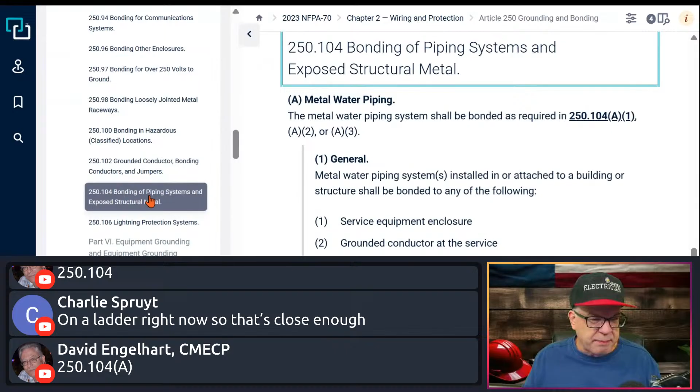So 250, here you see it says bonding of piping systems and exposed structural metal. Let's see it. So metal water piping, the very first one. It says 250.104. The metal water piping system shall be bonded, mandatory language, as required in 250.104 A1, A2, or A3.

A1 is the water piping general. A2 is the bonding when you have multiple occupancies and you have the water piping system in there, how to do that. And then, of course, you have building structures that are supplied by feeders or branch circuits. So we cover it all. You have your main building, a building with multiple occupancies that may have water lines running through all of it, and the one where you have to bond the water lines where a feeder or branch circuit is supplying a separate structure.

In that scenario, if you have the metal water piping, you get all the rules right here, nice and tidy. So if you're on an exam and you get something about the water piping system in a building, you're not thinking about the electrode, because that's different. We're not talking about 250.52 A1, water pipe electrode that is 10 feet in contact with the earth.

This is in the building or on the building, so it can be in it or running along the side of it. You're going to have to bond it. Most of the time we don't think about that today because most of what we use is PVC or PEX. But if you have copper, a metal water piping system running through or on the building, then you've got these rules.

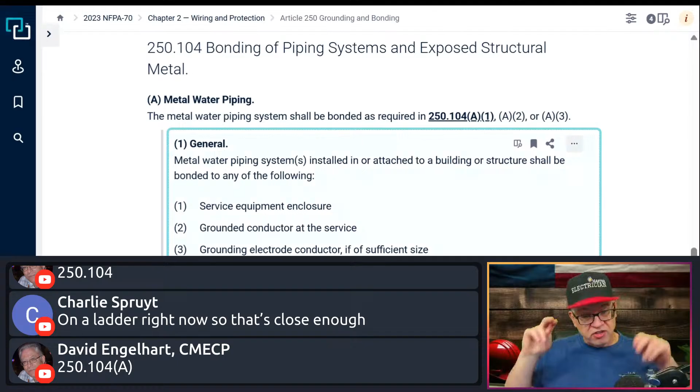If that separates the system, then you're going to have a jumper over it, because then you have part of the system that wouldn't be bonded. You have to bond the system, so it may require bonding jumpers to maintain the integrity of this bond. So where can I make this connection to? Well, I can go from the metal water piping system to the service equipment enclosure, wherever the service is, run it over to the enclosure.

You see here, it says it can go to the enclosure of the service because the service has got the grounded conductor with a main bonding jumper connected to the enclosure, so I'm getting that allowance here. Again, do not confuse applications like this with grounding electrode conductors and things like that. This is different. This is a bonding element.

I can also connect the metal water piping system to the grounded conductor at the service, so I could take it straight to the grounded neutral terminal bus, okay? Be honest with you, I could even connect it to the grounded conductor if you had an acceptable method to do that. Let's see here, next.

Grounding electrode conductor, if it's of sufficient size, so in my system from the service, if I have a grounding electrode conductor going to my electrode, but the grounding electrode conductor is of sufficient size, in other words, it would be the same size that would be required for the bonding jumper to the metal water piping system.

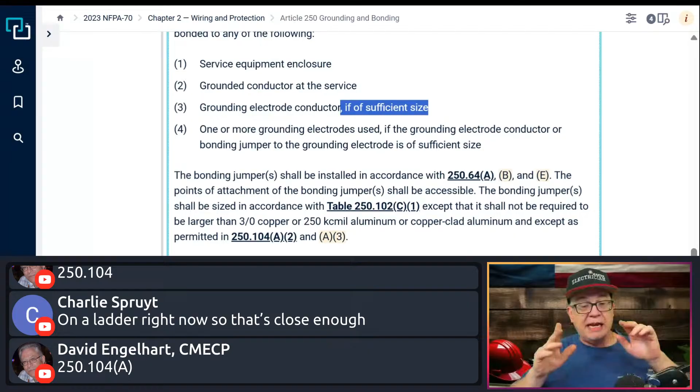Then I could connect to the grounding electrode conductor, right? And no, it does not have to be irreversible, okay? It could be a split bolt connection. Again, try to keep from intermingling the requirements for grounding electrode conductors to an electrode and all that kind of stuff. Keep them separate. That's the beautiful thing that I think about the code is even though it seems complicated and stuff jumps all over the place, once you get the flavor of it and you understand how it works, it's like a symphony, baby. You go from here to here to here and you get used to it, right?

Now, in the 2026, they'll try to make it flow a little better. Hopefully it works a little bit better, puts things in a little better logical location. Yes, you're going to have to learn some new articles, some new sections, but that's okay. If it makes it dance, if it makes this thing we dance with every day a little bit better, then okay. Hashtag dance with the code. That's what I'm talking about.

All right, so now it says, and then the other last one says one or more grounding electrodes used, if the grounding electrode conductor or the bonding jumper to the grounding electrode is of sufficient size. So an example of this, you may have an electrode and then of course you have a bonding jumper that connects other electrodes together because you're required to tie them all together in 250.50, right? So as long as if I go to the last electrode in the chain, as long as everything leading up to it is equal to or greater in size of what would be required for that bonding jumper over to that metal water piping system, if it's the same size or larger, then I can go to that electrode.

Okay, I can go to one of the electrodes itself, put a separate clamp on it and run it right to the electrode. That's okay too, probably not what people are going to do. You're probably going to take it back to the service enclosure. Probably what most people are going to do, that type of thing.

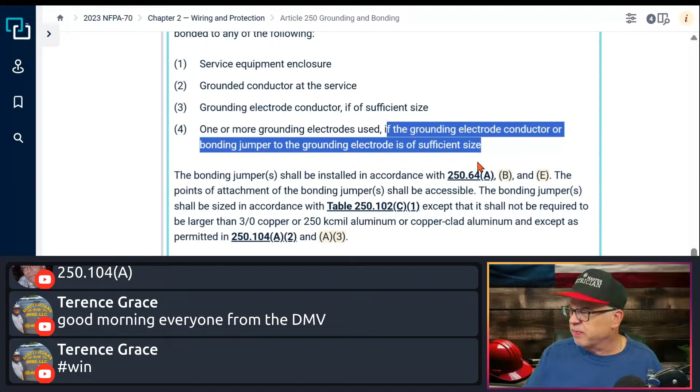Notice it says right here, the bonding jumpers shall be installed in accordance with 250.64 A, B, and E. So you got to meet these requirements. And if you don't know what they are, I'll just click on A. And this is still the requirements. For example, if you want to use aluminum, it can't be terminated within 18 inches of the earth unless it's in an enclosure that's rated for that, yada yada yada. And then you've got the other requirements you have to meet as well.

It says the point of attachment of the bonding jumper shall be accessible. So all of those connections that you're making have to be accessible for this application, all right? It doesn't say readily accessible, it just has to be accessible, okay?

It says the bonding jumpers shall be sized in accordance with 250.102 C1, except that it shall not be required to be larger than a 3/0 copper or 250 kcmil aluminum, and I won't talk about that product, that type of scenario, all right? So in general, we're going to size it based on table 250.102 C1, based on the size of the conductors that are supplying the circuit, okay?

And so if you're taking it back to the service, typically, if we're going to bond the water line, we're going to base it on the size of the conductors that are supplying the service, okay? That type of thing.

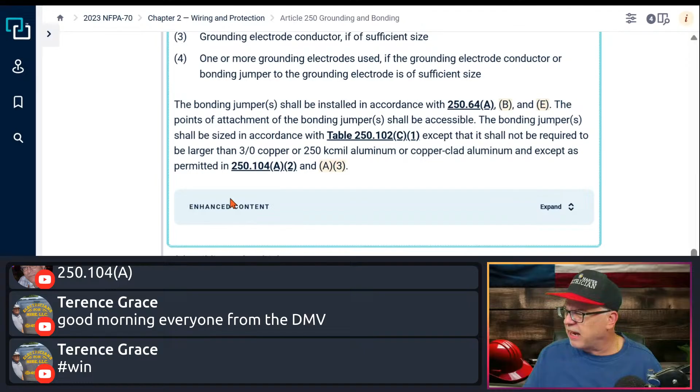So anyway, I don't know that they have a picture. They don't have a picture. But let's read it, let's just read it, because it's good commentary.

It says bonding a metal water piping system is not the same as using the metal water piping system as an electrode. We talked about that, okay? Bonding to the grounding electrode system places the bonded components at the same voltage level. So by making all this connection back like that, it puts everything at the same level, touch potential, things like that.

Again, this is not me saying it, folks. This is in the link, so it's commentary. It's the opinion of NFPA, but it's okay. It's a good opinion. I agree with it.

It says that isolated sections of metal water piping systems, such as used for plumbing fixture connections, that are connected to an overall non-metallic water piping system are not subject to the requirements of 250.104A. The isolated sections are not a metal water piping system. They're just components, fittings, valves, things like that. You get me? They're not the system.

Now, similar to how you size GECs in Table 250.66, which remember is based on the size of the supply conductors, it's based on the same premise as that. The bonding jumpers to the metal water piping system, although sized based on 250.102C1, which can differ here, it does make that statement that says they're not required to be larger than a 3/0 copper or 250 kcmil aluminum.

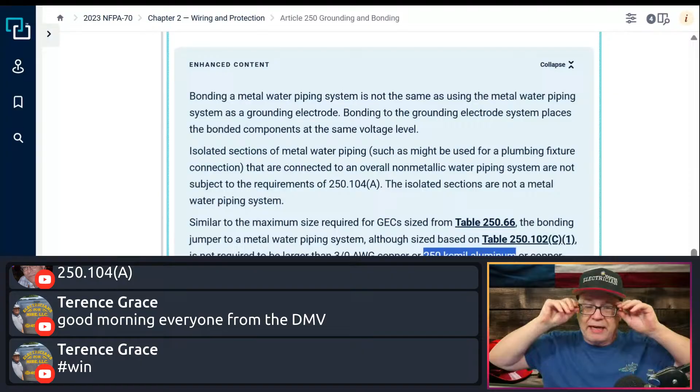So that's the largest it would have to be. So if you were like, dude, I don't want to do the math, and an engineer on a big building, a big multi-building with metal water piping system in it everywhere, says, dude, I don't want to calculate this crap out, all right, just run a 3/0 to it from the service equipment, switch gear, whatever. Run a 3/0 to it, done. Never has to be larger than that, because of the statement in there.

Makes sense. All right, so let's do this real quick. Let's take this, I'm going to copy it. Okay, so let me show you. And we're going to put the hog to the test. Okay, so here's the hog. Let me share this screen with you. This is the hog, for all of you that don't know who the hog is. Here's the hog, we're gonna paste it into the hog. Okay, so I've got it all pasted in there, let's see what the hog says.

All right, the hog says: yes, the metal water piping system in a building must be bonded to the electrical system to ensure safety and compliance with the NEC. According to NEC 250.104A, metal water piping systems must be bonded to the service equipment enclosure, the grounded conductor at the service, the grounding electrode conductor where of sufficient size, or to one or more of the electrodes used. This requirement applies even if the piping does not leave the building or connect to the grounding electrode. The purpose of bonding is to ensure that the metal piping does not become energized and pose a shock risk. Therefore, you should ensure that the metal piping system is properly bonded in accordance with NEC 250.104A.

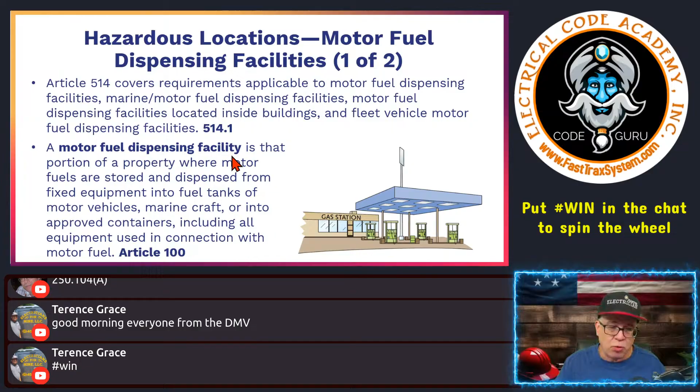So seal-offs would be within 10 feet immediately as they go past that classified location. In some designs, people put the seal-offs outside, running up the side of the building, before they transition into the building where all the controls are. I've seen them come into the building and have the seal-offs there, and I've seen them stay outside and not come into the building at all. It's all dependent on the engineer designing the system, or the state may be more stringent on those things.

So what we're looking at here is the fuel dispensing location—this is the pumps out there at the islands. You see this says table. These actually come from a table in 514, and we can go look at that real quick and show you what we're talking about.

So here is your 514.3. It says, again reminding us, where the term Class 1 is used with respect to the zone classifications within this article of code, it shall apply. So the same requirements for Class 1 are going to apply as well when it makes reference to Zone 0, Zone 1, or Zone 2. So in your mind, if you're seeing Zone 0, Zone 1, Zone 2, you're still thinking this is still a Class 1 deal that I'm dealing with.

It gives you some good information, explaining that down here a little better, because Zone 0, Zone 1, Zone 2 are also reference identifiers for gas, vapor, and liquid locations that are flammable—it's just a zone system. It differs from the class and division type of layout. We mainly see class and division.

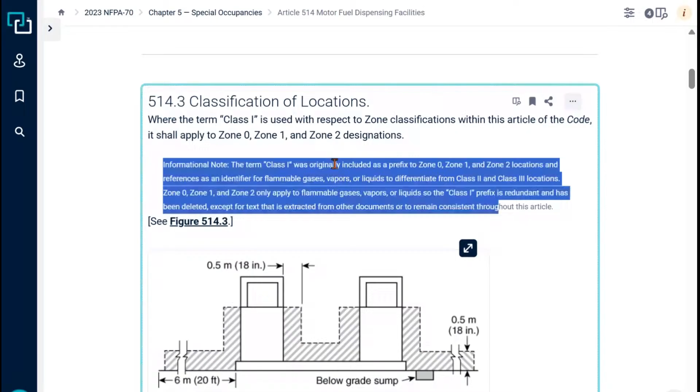We don't see that much zone classification, but more and more people are using it. It's very popular outside of the US.

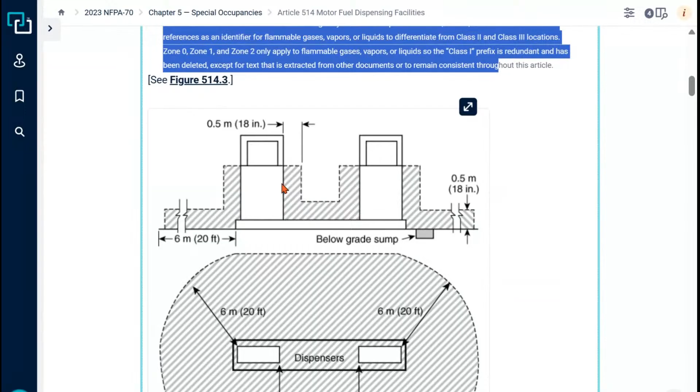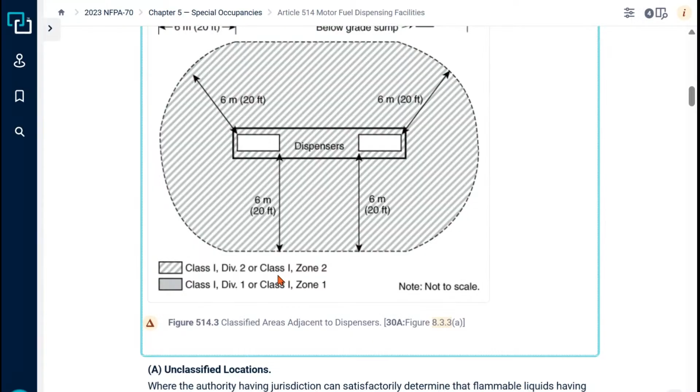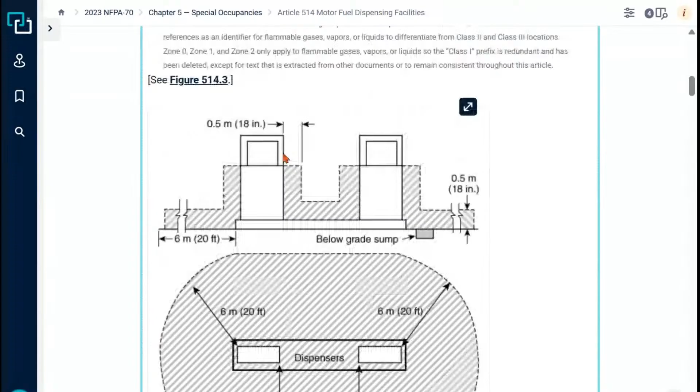All this area extends out 20 feet, and it goes up 18 inches. So it comes up 18 inches and goes out 20 feet all around the dispenser pumps. It extends 18 inches from the pump all the way around. Where the piping system runs underground, that's below grade, and that area will be a class 1 division 1 location.

Our illustration does a bit better job of showing this. Let's go back to the lesson. Here's your dispensing pump, let me zoom in. In this scenario, 18 inches out all around, 20 feet out all around, and 18 inches up from the earth - all of this area is class 1 division 2.

The area below it, that 20 feet, everything below it, is class 1 division 1. Any raceways or piping systems that go out from here, all of that is going to be class 1 division 1 underneath it.

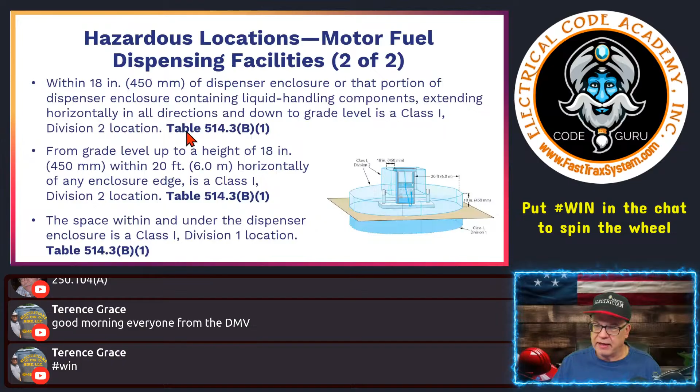So it says: within 18 inches of the dispensing enclosure, or that portion of the dispenser enclosure containing liquid handling components - all the little pumps and hoses - extending horizontally in all directions and down to grade level is going to be a class 1 division 2 location. That is what it says in 514.3b1, and I can show you that.

So we have this nice little illustration, but if you go down here, you can see it gets down to classifications and again references the drawing. So we get down to this right here, your class 1 locations. You get to the dispenser, and here is the language for that dispenser.

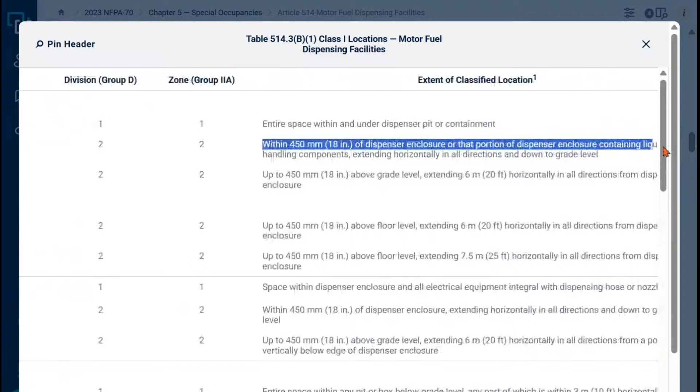It's real easy. It says within 18 inches of the dispenser enclosure, or that portion of the dispenser enclosure containing liquid handling components, extending horizontally in all directions and down to grade. It depends on your pump, but just remember: it extends out in all directions from the actual pump dispenser, and any part that handles those fuels - pumps, hoses, whatnot - 18 inches out, all the way down to the earth and up 18 inches from the earth.

And it extends out from that. Now let's go back to the left again. So that's just the dispenser. Now, the outdoors - your pump is outdoors, right? That adds another element to it. It's still division 2, but it's outdoors, and that's this one here.

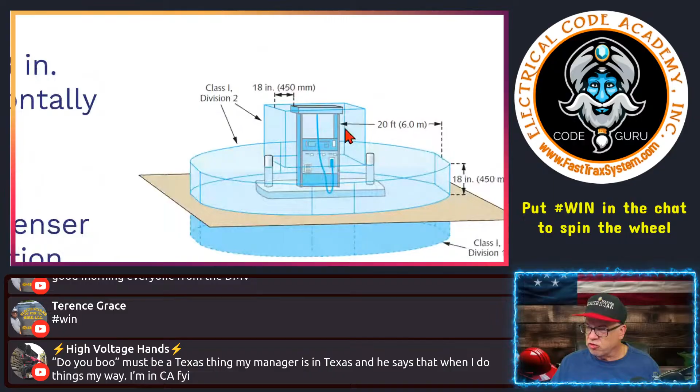That is where we get the other portion of it. It says: up to 18 inches above grade level, extending 20 feet horizontally in all directions from the dispenser enclosure. That's why we get this image that looks like this. To be generic, since we don't know where the components are, the NEC stops here, saying everything stops here. But it depends on you - it's 18 inches out, then up 18 inches, so 18 inches out from the dispenser down to grade, and 18 inches up out 20 feet in all directions. Makes sense? Okay.

All right, now space under it. So this is the B1. Okay, let's go back. Let me get back over here. Okay, all right, so there we go. So under dispenser containment. Oh sorry, got to go back here. Got to go back, it won't let me go back. Come on, go back. Come on, bro.

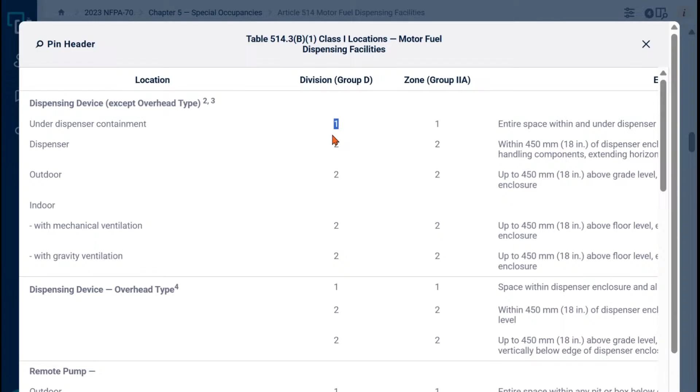All right, under dispenser containment, okay? Then you got over here, it's a division 1. See how that? Under dispenser containment, under it. It says the entire space within and under the dispenser pit or containment is going to be a Class 1, okay? All right, so all of that type of thing.

So one of the things to think about when looking at an illustration like this is 18 inches from the dispenser enclosure, or that portion of the dispenser enclosure containing liquid handling components, extending horizontally in all directions down to grade, is going to be a Class 1 Division 2. So the 18 inches out, from grade level up to a height of 18 inches, within 20 feet horizontally of any enclosure edge, is going to be Class 1 Division 2.

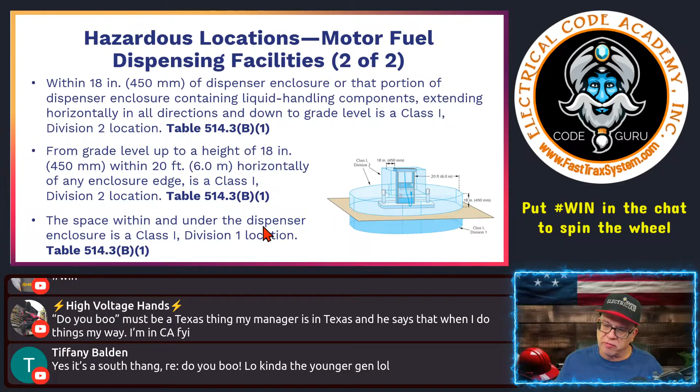Okay, why do you need to know that? Because you'll be transitioning underneath it, which would be a Class 1 Division 1, into a Class 1 Division 2, right? And you're going to have seal-offs inside that dispenser. And of course it says the space within and under the dispenser enclosure is a Class 1 Division 1 location, and you're going to have wiring, fuel lines coming in different directions, and other raceways coming in from other directions that transfer down through the dispenser, underneath it, down into the space directly below it. So you need to know you're going to be going from a Class 1 Division 2, transitioning down into a Class 1 Division 1 location.

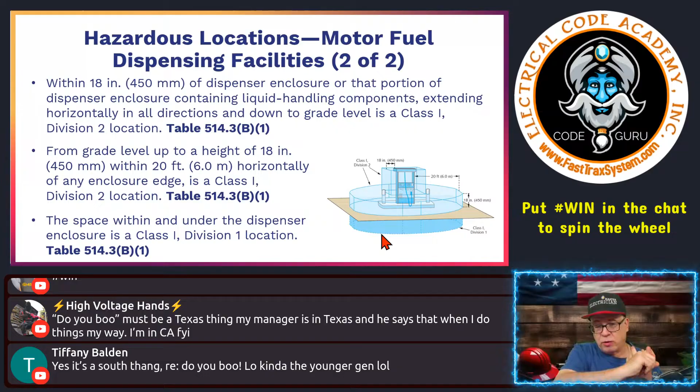And that's what we talked about in the last couple of days. It doesn't matter that it's motor fuel dispensing, get all that out of your mind. Just remember, we're talking classifications, we're talking transitions, we're talking seal-offs. We can forget that it's motor fuel dispensing at that point, because all we went here to do is find the parameters. Once we found the parameters of the locations, now we go back and follow the rules we have when transitioning, for example, from a Class 1 Division 1 to a Class 1 Division 2, and those type of things. Make sense?

Okay, I want to make sure that makes sense of all that stuff. Discussion: discuss the hazards around motor fuel dispensing facilities and why some areas are Division 1 locations and why others are Division 2 locations. All right, let's have a discussion.

The area within and under a gas dispenser is a Class 1 Division 1 location because it is likely that flammable gases will always be present. They are always going to be there, okay? Now, the area within 20 feet of the gasoline dispensing is a Class 1 Division 2 location, because although flammable gases may be present, they are not usually in sufficient quantities to produce an explosion, so they're not in concentrations that are there under normal conditions. So in that scenario, we can designate it a Class 1 Division 2.

Now some people can argue and say, well, I beg to differ, Paul, I think that there will be concentrations there, they could spill it, they could do this or that. Dude, why even rack your brain over that? Why even worry about that? The code says what it is. It says despite what you feel, doesn't matter. The code says that area is going to be a Class 1 Division 2. Get over it, do it. The area that says it's going to be a Class 1 Division 1, do it. Different, okay? Don't make it complicated. It doesn't have to be as complicated as some people want to make things, okay?

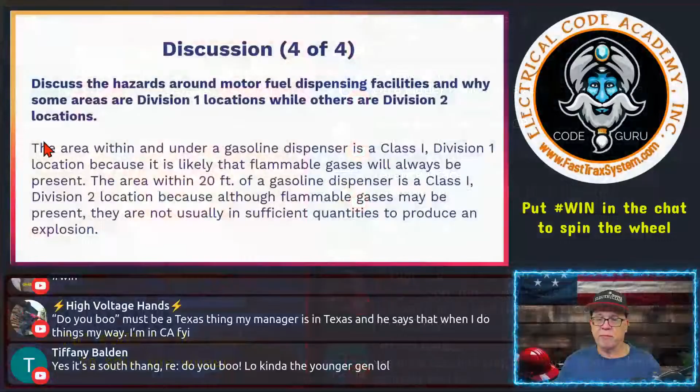All right, aircraft hangar, we'll go through this one pretty quickly. Article 513 applies to buildings and structures, or parts thereof, inside which aircraft containing Class 1 liquids or Class 2 liquids, whose temperatures exceed their flash points, are housed, stored, serviced, repaired, or altered. It does not apply to locations used exclusively for aircraft that do not now, nor have ever, contained fuel. Okay? Important.

It says the area within 5 feet horizontally from aircraft power plants, the motor, or fuel tanks is a Class 1 Division 2 or Zone 2 location, extending upward from the floor to a height of 5 feet above the upper surface of wings and engine enclosures.

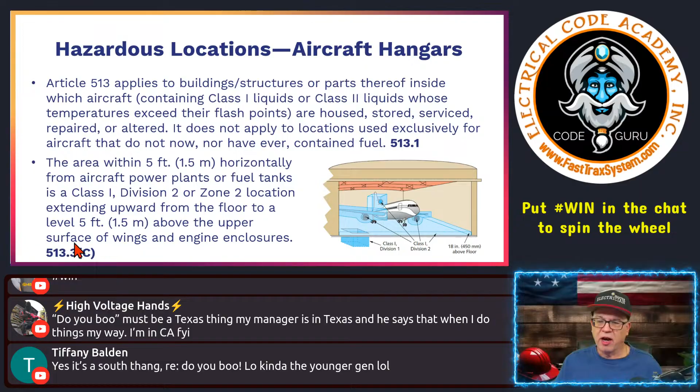All right, so we'll look at the illustration. You may have a service pit in this location, which would allow gases or fluids to accumulate, right? That would be a Class 1 Division 1. This area here, up to 18 inches above the floor, would be a Class 1 Division 2. These areas around the motor, up to the dimensions we just talked about, are also Class 1 Division 2. And this goes 18 inches above the floor, covering the entire area around there.

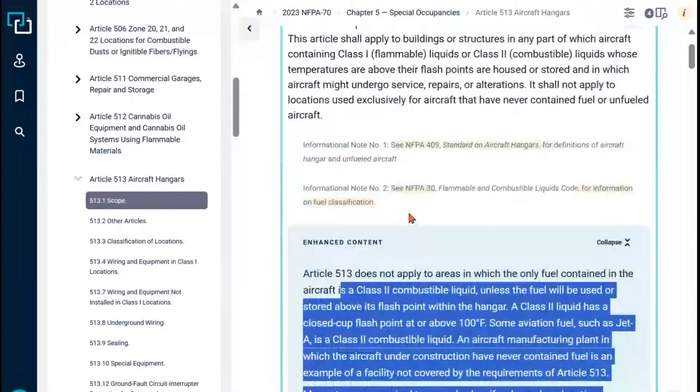And just for kicks, we can go look at it because, again, putting our eyes on it. Aircraft hangars, section 513. It's not very big. You have some examples here you can look at if it's still confusing to you. But what we're going to do is the classification, and this is where we got that information from. Again, it reminds us Class 1 still has the rules you have to meet. Class 1 is what it is, whether it's Zone 0, Zone 1, or Zone 2, it's still going to be a Class 1. So below floor level, that was that pit.

So any pit or depression below the level of the hangar floor shall be classified as a Class 1 Division 1 or Zone 1 location that shall extend up to said floor level. So that whole pit.

Now, areas not separated or ventilated. The entire area of the hangar, including any adjacent or communicating areas not suitably separated from the hangar, shall be classified as a Class 1 Division 2 or Zone 2 location up to the level of 18 inches above the floor. So what does that mean for us?

Let me give you an example. We have an aircraft hangar for Encore Wire. Encore Wire has a corporate jet. Y'all have probably seen me on videos I posted or pictures flying on it to whatever issues we might have around the country. So there is an actual separate area, a room for the pilots and for all of us waiting for them to get the plane ready. That area has separation and pressurization. So it's 18 inches up around that entire hangar that's considered Class 1 Division 2.

There's no pits because that's not a service area, it's just a hangar, so we don't have any pits in the floor. So it's up to 18 inches Class 1 Division 2. But once you go through that area into the pilot's lounge or just the lounge area, it becomes an unclassified location. So this only pertains 18 inches up out in the area, that type of thing.

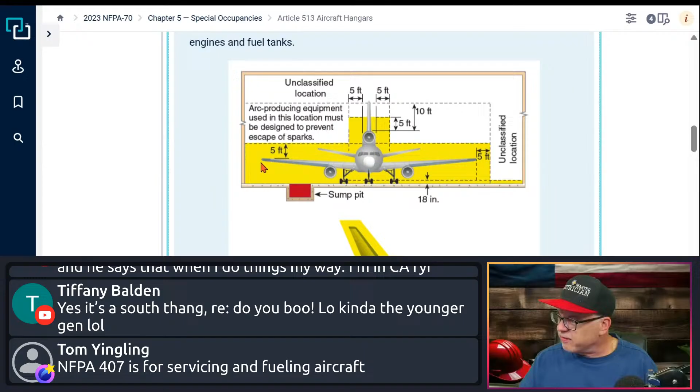I can be honest with you, I've only been involved in a couple designs here when it comes to this type of thing. Basically, we made it simple, stupid. We made sure that everything was Class 1, Division 2. We didn't have any pits. Everything in that hangar, we made sure up to a certain level was Class 1, Division 2. We made it a point to put all of our switches, all of our controls, and everything inside of the actual pilot area through the glass, so you control everything from in there. Or we had some type of controls that were outside of the hangar, so when you're entering the hangar, again, we tried to make it simple because we did not know where they would put the aircraft in the hangar, because it was a big hangar.

Rather, keep it simple, stupid, we kind of designed for this thing, so we always knew how we would design it. We just made most of the areas in there Class 1, Division 2, except for up in the ceiling, obviously. We didn't have any lighter-than-air applications there where we had gases that would float to the ceiling. We didn't have that scenario. So that's how we designed it. We just erred on the side of caution, okay? Everybody designs their own, but that's what we would do. All right, so that's a good depiction of it.

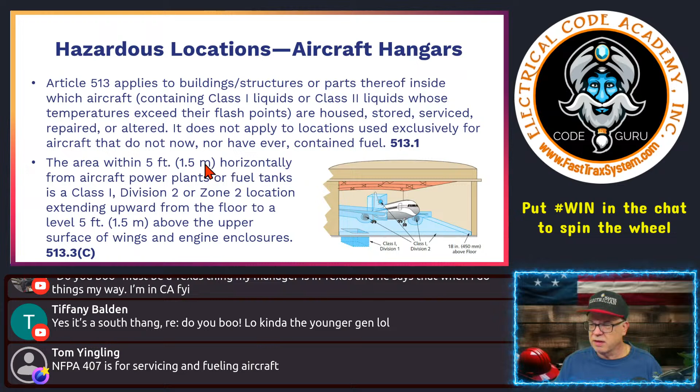Okay, next one is 515. This is bulk storage facilities, okay, where they're going to store lots of fuel in lots of tanks. 515 covers property or portions of a property, okay, so it doesn't have to be the entire designation of the property. It can be pieces of the property that are designed for bulk storage, where flammable liquids are received by tank vessels, pipelines, tank cars, or tank vehicles, and are stored or blended in bulk for the purpose of distributing such liquids by tank vessel, pipeline, tank car, tank vehicle, portable tank, and container.

We had an area of this also at Encore Wire on our campus, okay, where the train would bring in certain things, okay? So that is 515.1. That is the scope of what a bulk storage facility is, where gasoline and other volatile flammable liquids or liquefied flammable gases are dispensed at bulk stations. The appropriate provisions of Article 514 shall apply unless modified by 515, okay?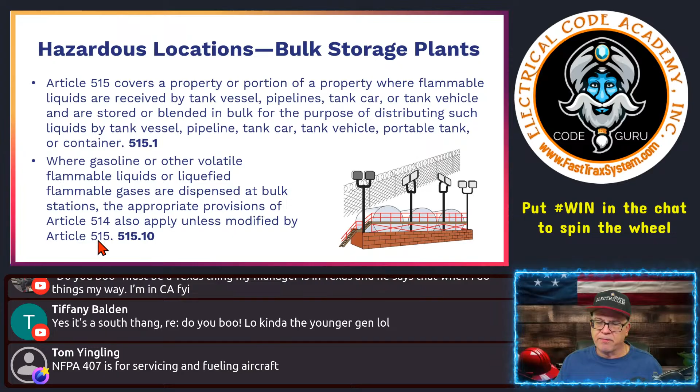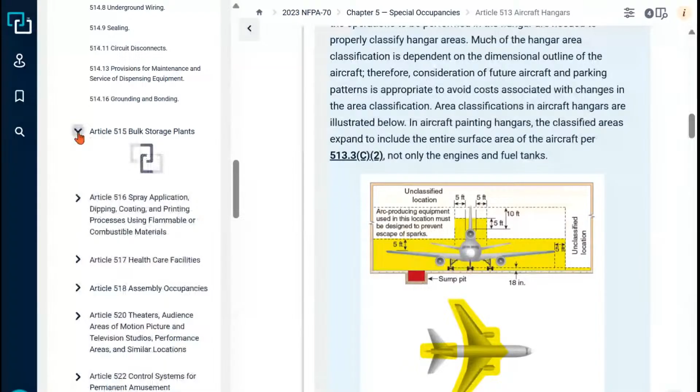So let's show you that real quickly if we go look at 515, to show you that language. Okay, so we're going to 515. And so this is the scope we're dealing with, all right? And so we've got all this stuff, and it talks about dispensing and classifications, okay?

All the requirements—here again, it's the same thing as we had before. We don't have to look at every one of them, but it's the same scenario we were dealing with. We have the different locations of where these storage tanks will be, and then it tells you what the division is, and then it'll tell you what the extent of that area. So it kind of gives you that area of classification that you have to follow.

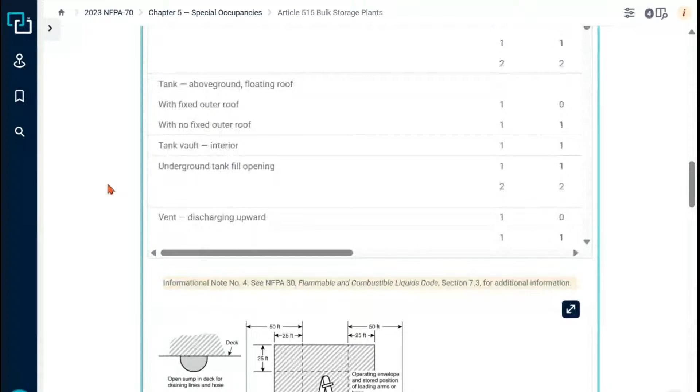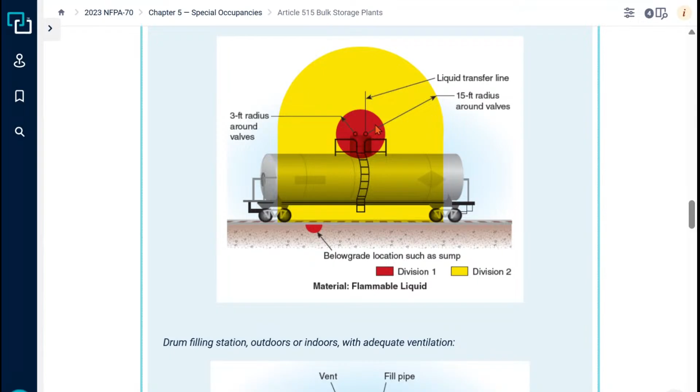Okay, so there you go, for example, there you go. So with bulk storage, you have your different radiuses or different classifications to determine what is considered. Okay, so this is liquid transfer lines coming in here. Bulk storage, here you go. You have a below grade location, such as a sump that might be here. You have a Division 1, then you have Division 2. Okay, and here it is differently right here. Here's the fuel dispensing, drum fill station—again, it has its own requirements, right? Notice how it comes out.

This is a drum, fuel drum dispensing, okay? This is storage, so all of these things, there you go. There's large containers, okay, storage tanks for cryogenic liquids, okay. Here is the area for the relief valve.

It's within 5 feet of that is a class 1 division 1. And then out, you have class 1 division 2.

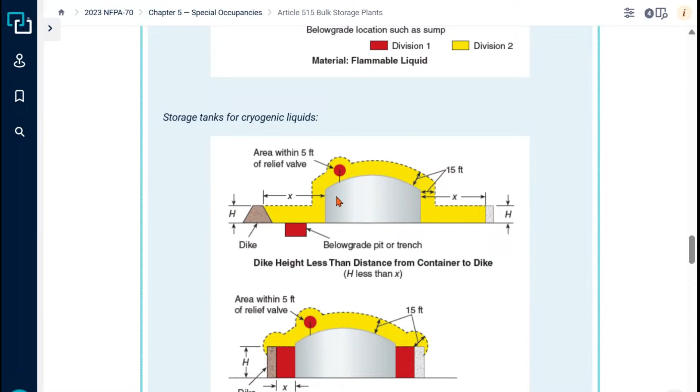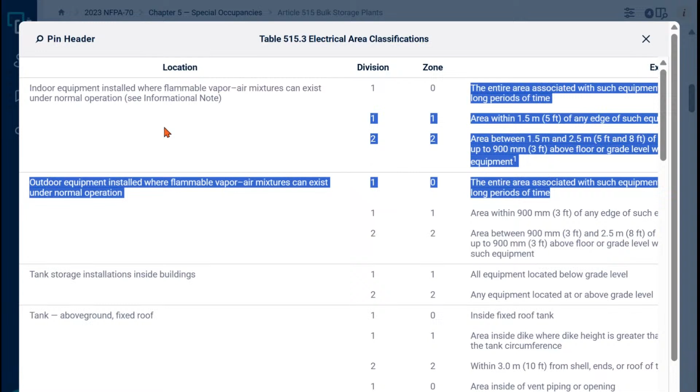So these are not brain surgery, especially if you're on an exam. You just have to come and look at this list right here. This list is going to tell you the location, where that bulk storage is, what zone, what division it is, okay, so you'll already know what the level of hazard is. And then over here, it gives you the extent of that, the parameters, 3 feet out, 5 feet out, 15 feet out, all of that. So again, not brain surgery. That's why I don't typically go too detailed into it, because all you've got to do is come and follow what the table says. That's it, okay?

All right, spray application, dipping, coating, and printing processing. Hey Paul, this might be something you deal with. So 516 covers the regular or frequent applications of flammable liquids, combustible liquids, and combustible powders by spray operation, I guess powder coating maybe, and the application of flammable liquids or combustible liquids at temperatures above their flash point by spraying, dipping, coating, printing, or other means. That's 516.1, that is the scope of what 516 deals with.

516 contains 5 parts, okay? Part 1 is general, going to give you the general requirements that you have to meet for this type of location. Number 2, it's going to talk about open containers that would be in this location. Part 3 is going to talk about spray application processes that are happening in this location. Part 4 is going to say spray application operations in membrane enclosures. And then part 5 is going to say printing, dipping, and coating processes. So 516 covers multiple applications that would be considered hazardous locations, specifically in dipping, coating, and printing type of scenarios.

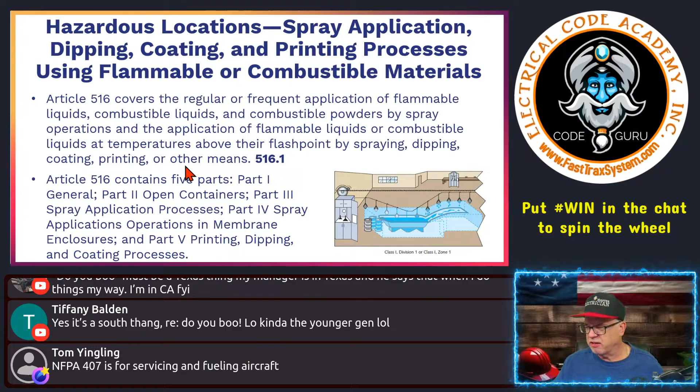And the only reason I'll show you this graphic here is that you can see, just like before, it's going to give you areas within the process that are classified, like that plane, right? The plane, around the plane. Same here, you're going to have areas in the area where the dipping takes place, where the spraying takes place, within different things, that you're going to have certain areas and distances from certain things that are going to require different levels, whether it's a class 1 division 1, all around the area where the dipping takes place. So kind of like this area encompasses all of this, and you'll get the dimensions on that, okay.

All right, so backing up a little bit and going now. So those were all locations we were doing what? What were we talking about in all those locations? We were talking about class 1 type locations, whether it's a div 1 or div 2, that's what we were talking about. Or whether we were just kind of overlapping a zone 0, 1, or 2, which all are basically referenced as a class 1. So we have all those same restrictions. Now the zoning may have some different variables on it. You're allowed to meet either, okay? But most people, again, are going to meet the zone.

1 second. Okay, no need for y'all to hear that.

But now we're going to look at class 2 division 1 locations. So what are class 2 locations? Combustible dust, right? Because dusts containing magnesium or aluminum are particularly hazardous, extreme precautions are necessary to avoid ignition and explosion. So 500.5C1, informational note, for example, remember 500 gives us the broad spectrum of the different types of conditions and the different types of materials, right? So it makes it very clear that magnesium and aluminum dust is a very high level of combustibility, right? And then, of course, class 2 locations are hazardous because of the presence of that combustible dust.

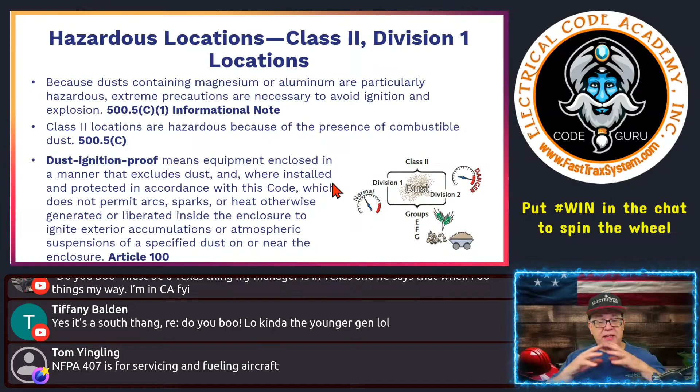Now, that is a division. Also, remember that a division 1 means that this dust can be there under normal conditions at any given time. It's present in levels that could be combustible. Whereas a division 2 is like, it's only going to get to that level under a dangerous condition, a rupture or something like that would allow a breakdown. So that's the easiest way I can tell people to remember it.

If it's there all the time and the volatile potential for an explosion is there every day, it's part of the process, it's part of the making of a product, it's there all the time, then that's a division 1. If it only can happen during an accident, a rupture, things like that, then it's going to be less. It's going to be a division 2.

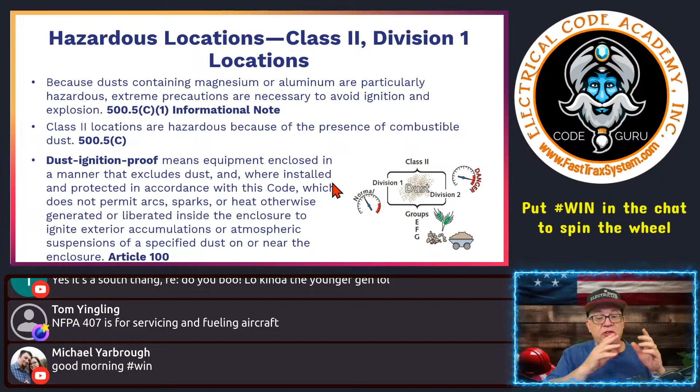Remember, division 1 is more stringent than division 2. Products that are rated within a class for division 1 may be acceptable in a division 2, but it doesn't always mean that a division 2 can be used in a division 1. You get what I'm saying?

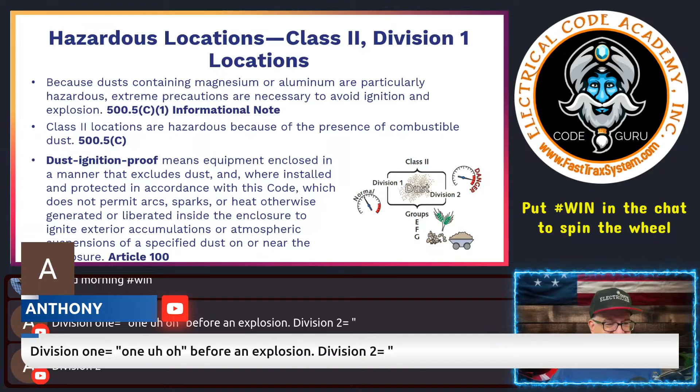What does Anthony say? Division 1 is one uh-oh before the explosion. Division 2 is two uh-ohs. There you go. All right, let's see where we're at. No, division 2 would be, oh no, damn it. Division 1 would be like, uh-oh, boom. All right.

So let's see here, that was division 1. Division 2 says the quantity of combustible dust that is present and the adequacy of dust removal systems are factors that merit consideration in determining the classification and may result in an unclassified area. So that means that I could have a location that operates all the time, and it's to be a division 1, it's always there under normal conditions. But I could have a division 2, which may have some type of removal system that takes it from a class 1 division 2, or a class 2 division 2, basically removes it all the way down to an unclassified area. And in an unclassified area, I can run any of the wiring methods that I want to run.

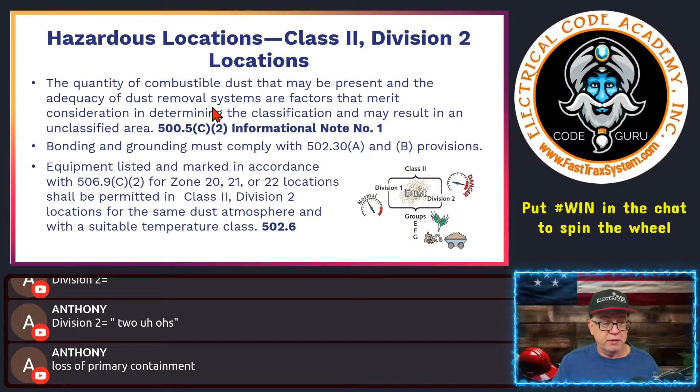So sometimes people use systems that will take a class 2 division 2 and do a certain number of air exchanges or a certain type of filtration system, or do something to remove the classification and take it down to an unclassified area. Why would they do that? Because then they can use standard wiring methods. If y'all have never priced classified location products, they're expensive. Ask Tom, I guarantee you he's worked with it. This stuff's expensive, so it behooves a designer to get it down.

Well, I think of Division 1, you better run for your life. Division 2, you can skip a little bit. Maybe you can skip and hum, but you better go quickly, okay.

Bonding and grounding, again, must comply with 502.30 A and B. Now, we looked at this a couple days ago. Same concepts, it's giving you grounding and bonding requirements. It's going to end up sending you to things like 250, 102D, and all this kind of stuff, and E for jumper. It's going to send you there.

Just remember the .30 within 501 and 502. Just remember in your mind that the .30s of the hazardous locations, when it comes to 501s, 502, they are grounding and bonding, and they're going to end up sending you somewhere. It's not going to go too extensive into grounding and bonding in 500s and 501s and 502. It's going to send you somewhere to give you some additional requirements for grounding and bonding. I can tell you right now, you want to make sure you follow all of your grounding and bonding rules in these locations.

All right, equipment listed and marked in accordance with 506.9C2. Now, 506 we haven't talked about, and again, it's just zone requirements.

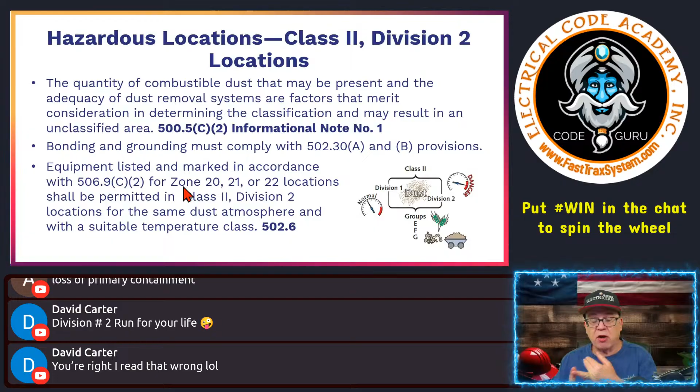Also remember, the groups for a Class 2 are what? E, F, and G. Whereas the groups of different types of materials for a Class 1 are A, B, C, and D, remember? I know you folks remember because y'all are sharp. Y'all remember those things.

All right, now what are the wiring methods? You saw the wiring methods we had before in previous episodes, go back and watch them if you don't remember. So now we're moving into Class 2. Approved wiring methods in Class 2 Division 1 locations include threaded RMC, same as it was in Class 1, threaded steel IMC, that was the same in Class 1. Or type MI cable with terminations fittings listed for the location.

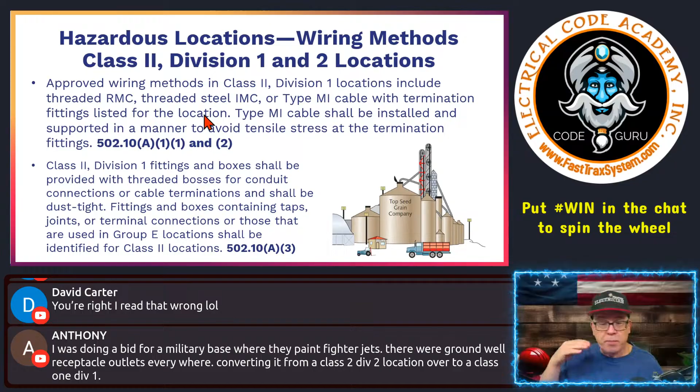So an MI cable, ain't nobody going to be messing with that. But if you did, you need to make sure that the fittings on the end are rated for the location, whatever the hazardous location class is. Type MI cable shall be installed and supported in a manner to avoid tensile stress at the termination fittings. Again, this is all based on the specific types of fittings you're going to get for the class location that you're going to be using it in.

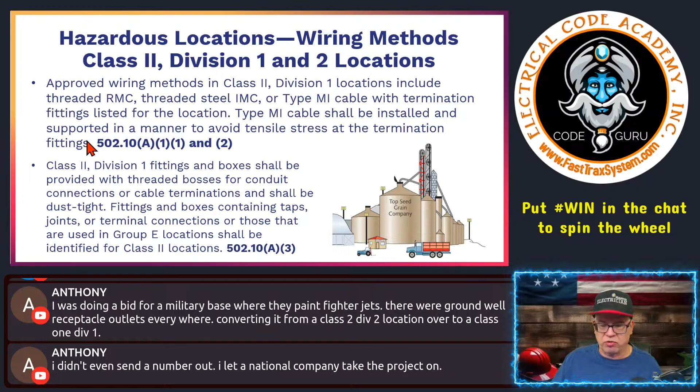I don't know many people that use MI today, okay? I just don't. But you can, there's still people that swear by it. It's still made, I just would never do it. I'd go with something else: hazardous location tray, hazardous location MC, air guard by Prysmian. I would do something before I messed with an MI cable, mineral insulated. I'm going to go to something else. It's just, to me, too much trouble.

By the way, they make MI cable with multiple conductors and single conductors as well, if you didn't know that. If you've ever done it, I've only done it a couple of times. Making up the connections takes me forever. You get better at it, but I don't do it every day. So when I did it, I was like, this is too much work. And I know guys that do it all the time and they're like, no Paul, this ain't nothing. Not my thing I want to do. I'm just saying.

All right, now Class 2 Division 1 fittings and boxes that are going to be used in these locations. So assuming you have the wiring methods and you're going to be installing the location, we can go look at the list because that's not an all-inclusive list of all the wiring methods. But now we're talking about fittings that are used on these wiring methods and connected to these boxes.

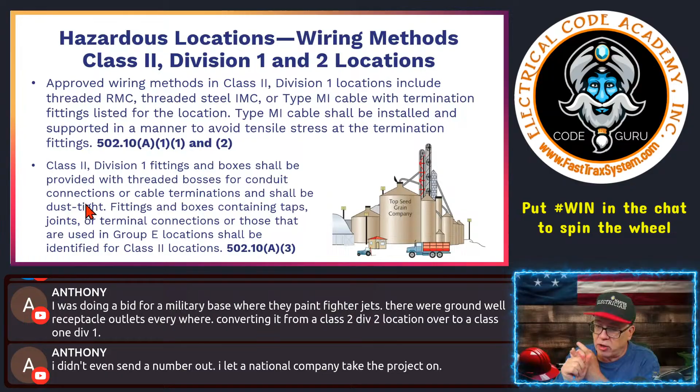It says Class 2, Division 1 fittings and boxes shall be provided with threaded bosses for conduit connections or cable terminations and shall be dust tight. So looking at your fittings, make sure they're listed for the location. Obviously, if you're using them, you have to use all listed fittings with the listed wiring methods.

Ery's working with some MI cable right now. Awesome. You love it? Is it the best thing you ever? I just don't like all the pieces to it.

And the fragility. Is that a word? Big dog, is fragility? Dude, I made my own word up today. Fragile and agility, fragility. Hashtag fragility. Paul just made up a word. If I had Grammarly connected today, they would probably say, what the hell are you making up words for?

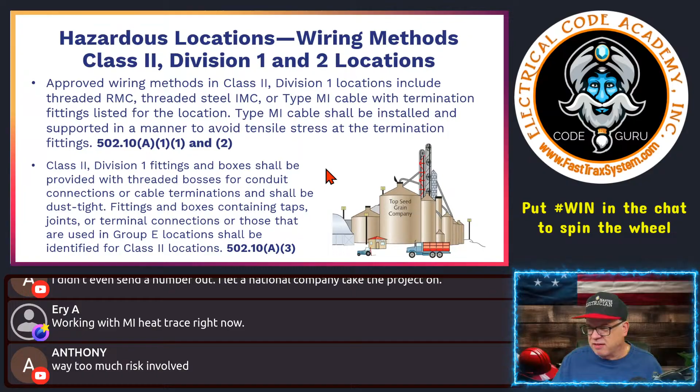All right, anyway. So in this case, fittings and boxes containing taps, joints, or terminal connections, or those used in Group E locations, shall be identified for Class 2 locations. Make or break connections, that type of thing. We need to make sure that the equipment is a Group E type location rating on that piece of equipment, and it has to be a Class 2 location identified product.

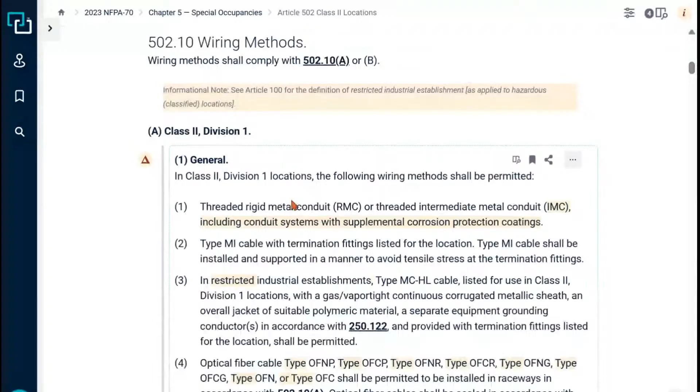All right, real quick, let's just go look at it because I said I was going to do it today. I want to look at this one. So just to show you that there are other wiring methods. So this is 502. There ain't no O in 502, it's 502. Okay, so here's Division 1.

So here you go, here's your threaded. That's what we just looked at. There's your MI. And of course, you have restricted industrial establishments, so again, you have to quantify that this is an industrial establishment. That's why we show it as these are the general ones that don't matter what the establishment is. But if you have restricted, that means restricted access only to persons that are allowed to be there under restriction.

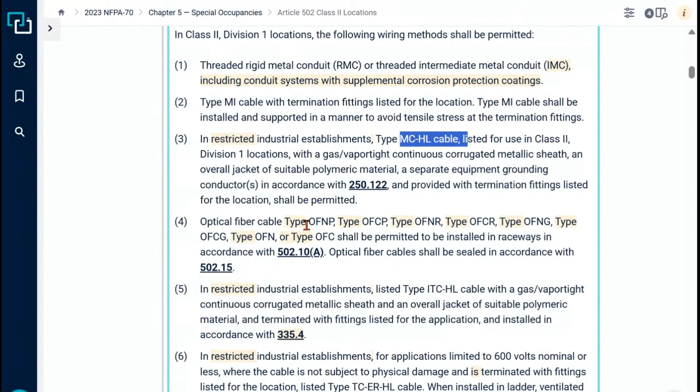Things like that, then you have other options. You have MCHL, right? Let's see here. And again, it's all about the terminals. The fittings have to be rated to keep from gas transfer or accumulation of dust transfer.

Let's see here, you've got your optical fiber stuff. And here, again, restricted to industrial establishments. We have the instrumentation tray cable application. And then here you go, here's restricted again, you have TC, ER, HL, those type of things. Again, it's limited to 600 volt applications or less. Okay, and then of course, here you have type P cable, that type of thing. So you have other applications.

And if flexibility is needed and it is necessary, then you have other types of connectors. You can get some liquid tight flexible connectors that are pre-made, that already have the fittings on each end. They're pre-made, they can be used in those locations. You can use liquid tight flexible metal conduit with listed fittings, as long as you follow the bonding requirements in 502.30, so you got to do a little something extra. Can't allow the liquid tight flexible metal conduit to suffice for any bonding, so you got to do a little something extra, a little something, right.

Interlocked MC that has an overall jacket suitable of polymeric material, like a PVC jacketed MC, that's an interlock PVC jacket, that may be acceptable. But again, then you're going to have fittings on the end, and those fittings are not just normal MC fittings. So just because I might say, oh, I can use PVC jacketed MC in there, not unless you can get a fitting that goes with that. And we're not just talking about a normal wet location type PVC polyolefin coated fitting that is designed for use with a PVC jacketed MC. No, I have to make sure that I have a fitting that's listed for use in a Class 2 Division 1 location to go and work with my PVC jacketed MC. So I do have some flexibility options, but I'm still going to be limited to the fittings.

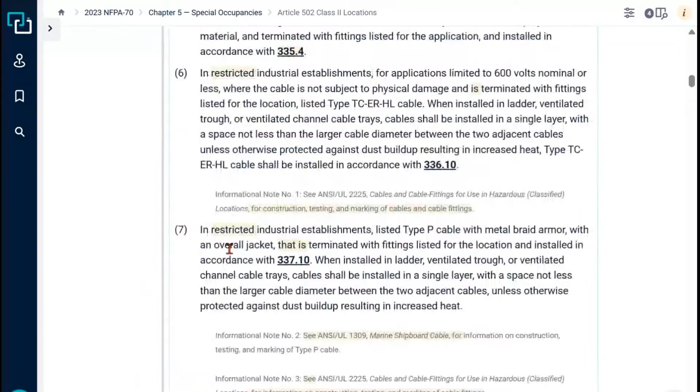So there you go, so that's the different, and again, there you got other different options depending on it. Again, it's not brain surgery. For those that are taking an exam, it is not brain surgery. When it comes to classified locations and applications, it's basically really just lookups. These aren't calculations for the most part. You don't have to, it's just know where to go, that's it, and know how to break it down. And I have shown you how to start at 500 and how to identify out where you need to be. It's not complicated, and then you just go through the list.

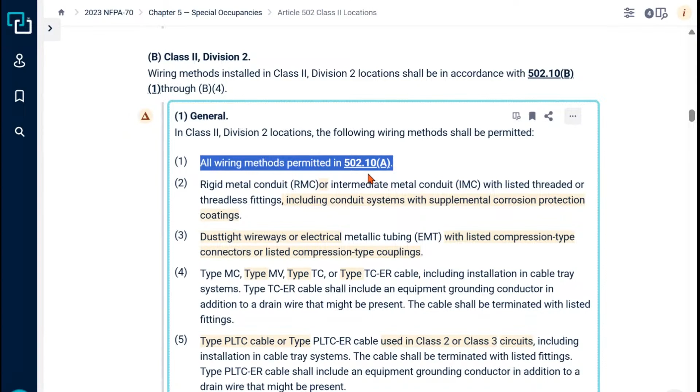Now, here's Class 2 Division 2. You see that I can use any of those wiring methods that we just talked about in 502.10a, right? I can use any of those, I can use any of these up here, right? You got to follow the rules, but I can use any of them, right?

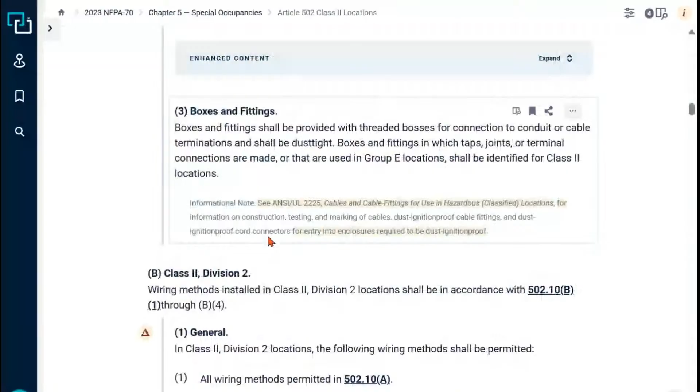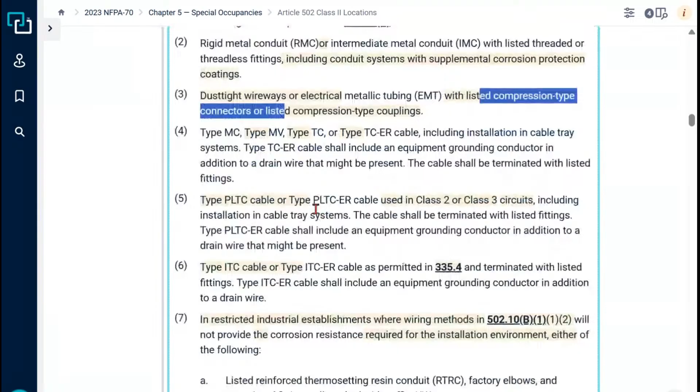But then I have other allowances. There's rigid, there's dust-tight wireways. EMT can be used, again, with compression-type connectors, okay? I can use regular MC. Again, this is Class 2 Division 2. So as you can see, you have other options. And so that makes a difference for folks.

Why do we want to go from a Class 1 Division 1 to a Division 2, or a Class 2 Division 1? We want to get to where we can get to a Class 1 Division 2, whether it's air exchanges or whatever we have to do, because the less restrictions, the cheaper the material, the cheaper the product cost. And if you can get it down to an unclassified location, a normal location, whether it's air exchanges or some type of protection system that reduces it to where it's no longer a classified location, then you can use the regular wiring methods you'd normally use, like EMT and all these other things.

That's why we try to do that. Now, there are some areas in a building you just can't do that. You're just going to have to install the proper wiring method for the hazard that's there, right?

Makes sense, right? Yeah, Anthony, static is a huge concern in a lot of these areas. Yes, static will build up on components. That's why bonding is so important, all those type of things, because again, differences of potential, creating an arc. For God's sakes, you don't want to create an arc in a location where it's volatile. It might be the last time you do, okay? I'm just saying.

And then, of course, you have locations where it's natural gas, or you might have lighter than air types of gas that you won't smell, you won't see, okay? And it floats up to the ceiling and stays within 18 inches of the ceiling and accumulates there. You know what? When you're dealing with hazardous classified locations, it's not brain surgery. It's just that you have to understand what's being installed in these locations, right?

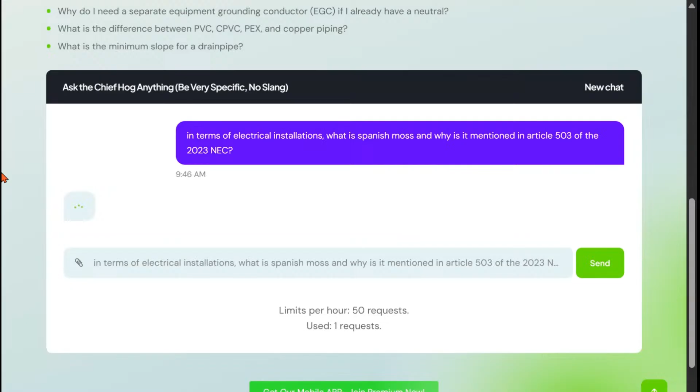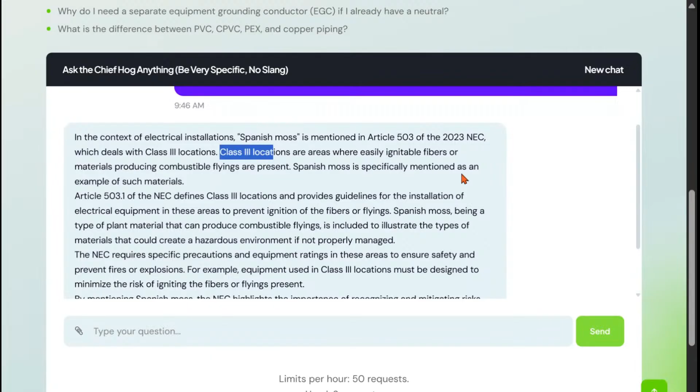I kind of know what Spanish moss is, but I'd rather use one that I know to see. Okay, so in context to electrical installation, Spanish moss is mentioned in Article 503 of the NEC, which deals with Class 3 locations. Class 3 locations are areas where easily ignitable fibers or materials producing combustible flyings are present. Spanish moss is specifically mentioned as an example of such material. And it goes into yada, yada, yada.

In mentioning Spanish moss, the NEC highlights the importance of recognizing and mitigating risk associated with natural materials that can become airborne. I guess the Spanish moss can float up into the air, right? And poses fire hazards in certain industrial or architectural settings.

So here's another example of how we use Trade Hog. I'm going to say, but what is Spanish moss? And where might we find it? And so let's do it here, let's see what the hog has to say. We're working the hog today.

Spanish moss is a type of epiphytic plant that is commonly hanging from trees, branches in warm, humid climates. Absolutely, I've actually seen it down in St. Simons in Georgia when I was down there teaching, up in the trees. It is not true moss, but rather a flowering plant that belongs to the bromeliad family.

Spanish moss is characterized by its long grayish strands that drape over the trees, giving a distinctive appearance often associated with the southern United States. You can typically find Spanish moss in the southeastern United States, particularly in states like Florida, Georgia, Louisiana, South Carolina. It thrives in an environment with high humidity and is commonly seen on live oaks and cypresses.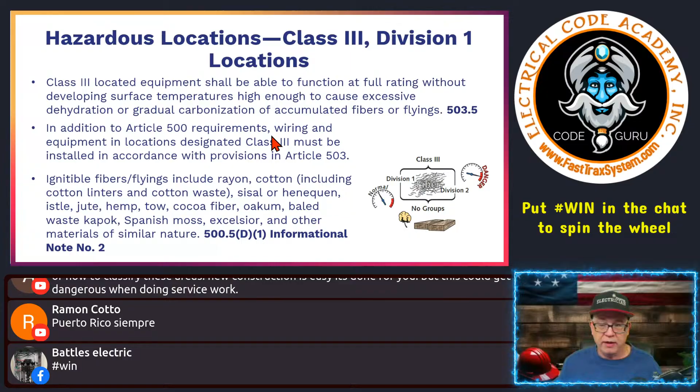Now, Class 3 Division 2: equipment listed and marked in accordance with 506.9C2 for zones 20, 21, 22. Okay, there you go, another tip - zone 0, 1, and 2 is class 1. Zone 20, 21, and 22 can have context to class 3, so that tells me zone 0, 1, and 2 is specific to class 1. Zone 20, 21, and 22 - I told you the tip earlier to remember the 2. Okay, well, now we've learned that it's a broader.

So that means those zones pick up the other types of classified locations. So 0, 1, and 2 class 1. 20, 21, and 22, class 2 and class 3 applications specifically, all right?

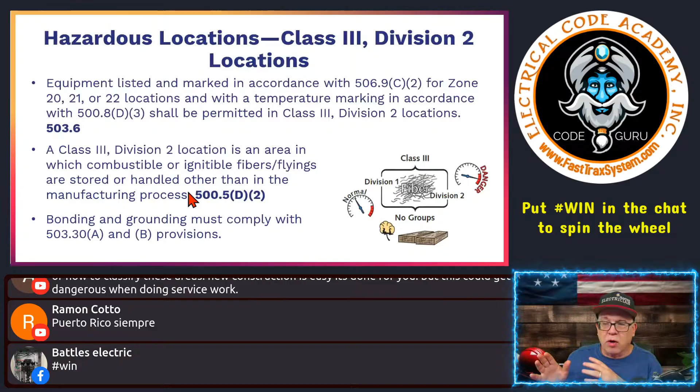Learning new stuff as we go. Now, class 3 division 2 locations are where ignitable fibers and flyings are stored or handled other than in the manufacturing process. The manufacturing process is going to be class 3 division 1 because it's producing at any given time. We're talking more about division 2, storage or handling areas, or where they may stack the stuff. So you could have where they produce it, and then take it to a separate part of the room or building where they handle it, store it, and things like that. That's going to kick it into a different division.

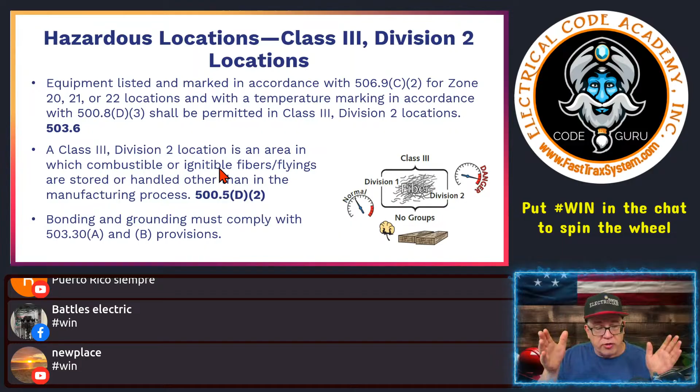And again, bonding and grounding requirements depend on what you're using, dot 30, A and B. Remember that dot 30 is our grounding and bonding directive point, the holy grail, if you will, for grounding and bonding within the hazardous locations, which is going to end up sending you other places that are more germane in Article 250.

All right, wiring methods in Class 3, Division 1 and 2. So we're kind of rounding it out here. This is the last slide.

It says Class 3, Division 1 and 2 luminaires for fixed lighting shall provide enclosures for lamps and lamp holders designed to minimize entrance of fibers and flyings, and to prevent the escape of sparks, burning material, or hot metals. Any filaments that burn out, anything that were to burst, they've got to be contained within the luminaire itself. Each luminaire shall be clearly marked to show the maximum permitted lamp wattage without exceeding the exposed temperature value of 165 degrees Celsius, 329 degrees Fahrenheit.

Very important. So for the luminaire itself, you don't want to overlamp it, overwatt it, because then it generates more heat, more watts heat generates more. So it has a threshold. It's very important in these areas because, again, the restrictions are a lot less than it would be in a class 1 or class 2.

This is class 3, a lot less restrictive. But when it comes to the luminaires and the lamping, you want to make sure it's not going to be overlamped and generate more heat than the luminaire can handle, which could cause a problem with surface heating. It could heat up any of these fibers or flyings that land on it, that accumulate on it, that type of thing. Unless the requirements of 503.10b2 are met, Class 3 Division 2 location wiring methods shall comply with 503.10a.

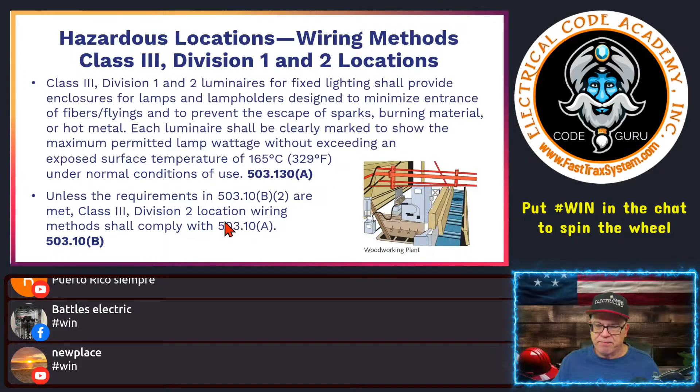Okay, so let's go real quick and end this part up by looking at the different types in 503, because we've looked at all the other ones. So let's go on and see what's different about 503. So here's the wiring method. So what do we got? Here's your wiring methods. So Class 3 Division 1, all right, rigid intermediate.

Notice this right here, first introduction, PVC conduit. So this is still a Class 3 Division 1, but again, it is not the same as what we would have in a Class 1 or Class 2, right? So PVC is introduced in here. RTRC, resin type conduit, intermediate metal conduit, EMT, dust-tight wireways, MC cable, MI cable with listed terminal fittings.

Why you'd want to mess with MI, I don't know, but you do you. Boo.

Power limited tray cable, power limited tray cable with the ER classification, instrumentation tray cable, same with an ER. ER again means that it can extend out of the run to a piece of equipment or jump from tray to tray with minimum length distances, not more than 6 feet, that type of thing.

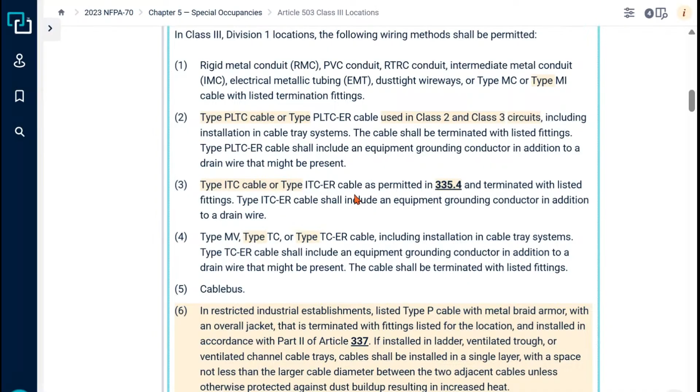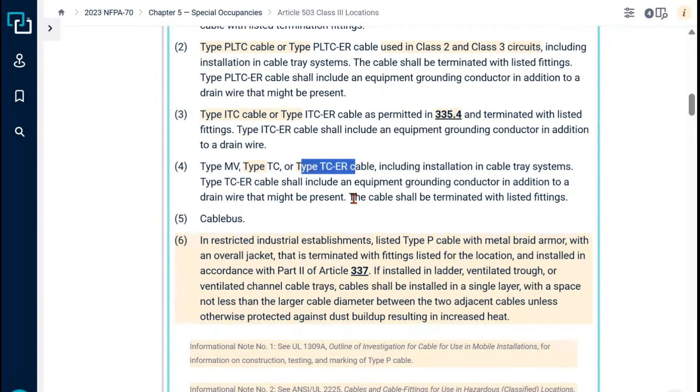Medium voltage, normal tray cable, and regular - this is power and control, by the way. So you have the ER, and you notice there's no restriction. But you do get down here and you say, well, what about that type P, which is amazing to me because type P is like shipboard cable. You could beat that shit with a damn brick.

But anyway, it's still only used in restricted industrial establishments as of right now. Okay, there you go. Let's see here. All right, and of course with boxes, it says all boxes and fittings have to be dust tight. So again, you got something that might meet the class 2 division requirement.

If they say they're dust tight, then they might still be usable here in this application if they're listed as dust tight. And of course, you have flexible connections here.

You can use LFMC with listed fittings, or liquid-tight flexible non-metallic with listed fittings. Again, you still have your bonding requirements because it is non-metallic. You're using it for flexibility, so it usually means it's connecting onto another type of wiring method. It may have been rigid, and now you're connecting this onto it to get to something where you need the flexibility. So you've got to remember, you still have bonding requirements going between one piece and another. That's why it makes reference to dot 30.

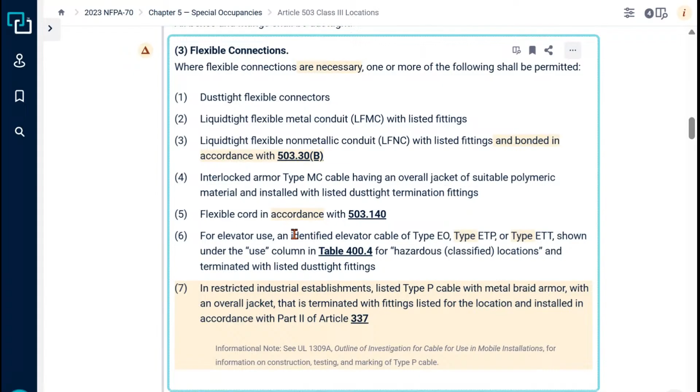Interlocked MC, having an outer jacket of suitable polymeric material, uses listed dust tight terminal fittings. So again, not PVC jacketed MC with standard fittings — they have to be dust tight listed. Easy to find. Flexible cord.

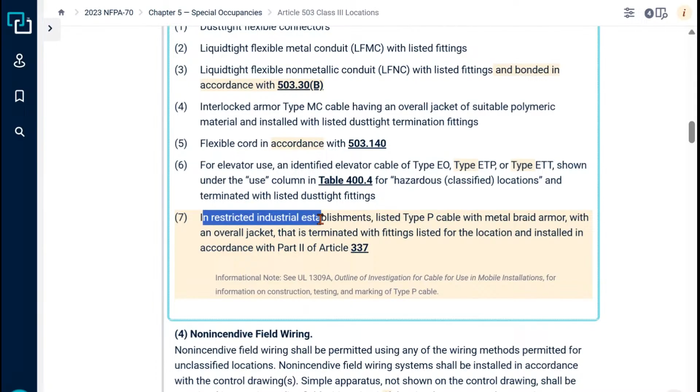You have very limited application with cord, but sometimes you do have the flexibility to run cord to certain pieces of equipment, that type of thing. And then of course you have restricted applications again for industrial, for Type P, that type of thing.

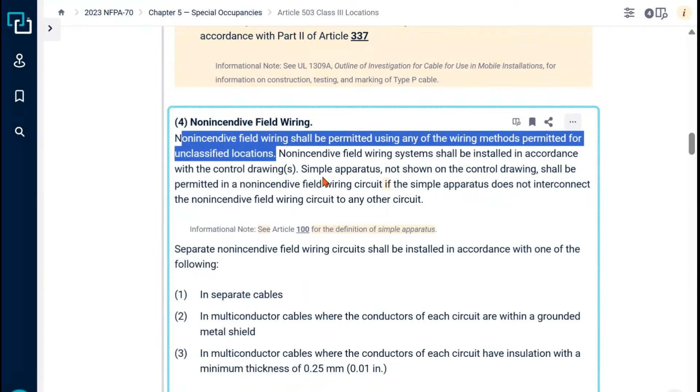And of course, you have non-incendive wiring. We talked about that a couple of days ago. You're permitted to use non-incendive field wiring, using any of the wiring methods permitted for unclassified locations. So that would be any of the normal wiring methods you would use every day of the week. It is non-incendive, meaning it does not have the ability to cause a fire or to cause something to auto-ignite.

That's the easiest way I can say it. I know I'll offend somebody by saying that. Paul, why'd you have to say that word? Dude, I'm either going to hell already, or — if a murderer can ask for forgiveness and get into heaven, then I'm okay. I think I'm okay saying the word ass. I'm not going to lose sleep over it.

All right, reflection. Take a moment. Reflect on the different classifications: Class 1, Class 2, Class 3. Class 1 is gases, vapors, flammable liquids, things like that. Class 2 is combustible dust. Class 3 is combustible fibers or flyings.

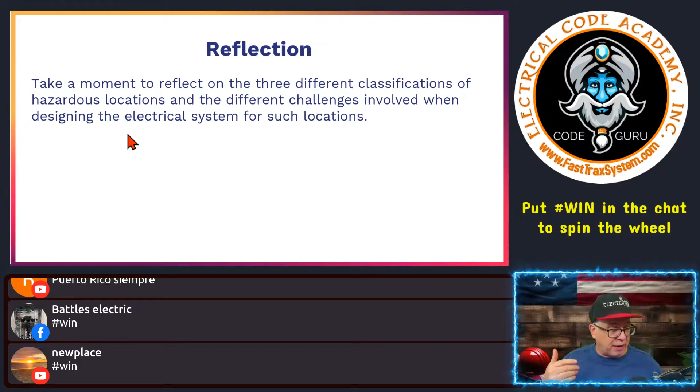There's a Division 1 and Division 2. Division 1 is more restrictive than Division 2. We should always be trying to get from a Division 1 to a Division 2, or depending on our protective system, to an unclassified location. Why? Because in unclassified locations we can use any of the wiring methods we want in Chapter 3. We're restricted once we're in hazardous classified locations. So we always want to try to get to unclassified so we can use whatever wiring method we want. It's less money, costs less, jobs are more affordable, and you're going to win the job probably.

Thus the reflection. What else do we have to remember? We have options for the wiring methods, and we have flexible options, those type of things. So remember, if you're lost anywhere, we did it — it's a 30,000-foot view, because I just don't think hazardous classified locations are as hard as people want it to be.

Now, where can it get hard? If you're that guy out there that wants to be the expert on all the different types of flammable materials, you want to learn all the auto-ignition points, the different types of materials that combust and what gas combusts at — that's the stuff you can dig deep into. As an electrician, I don't have to dig that deep, but maybe you want to. So get into a hazardous location program.

I quote code and I can go look at it. I can teach you code. But I am not the kind of guy you're going to hire to design a hazardous location — I can do it to code. But if I'm being hired to determine whether or not this fuel or this liquid is of a certain ignition point, no, I'm going to go to the manufacturers. I'm going to ask the people — here's how I did it years ago: if there's a fuel there, I went to the people that supplied the fuel and said, give me your product sheets, let me know the temperature values.

Let me know everything about your fuel. Then I would go to another location. If I was getting equipment from a manufacturer that makes the boxes, like Eaton or Cutler Hammer or whoever it was, or Schneider, I'd say, give me everything on this for a location that has to be Class 1, Division 1.

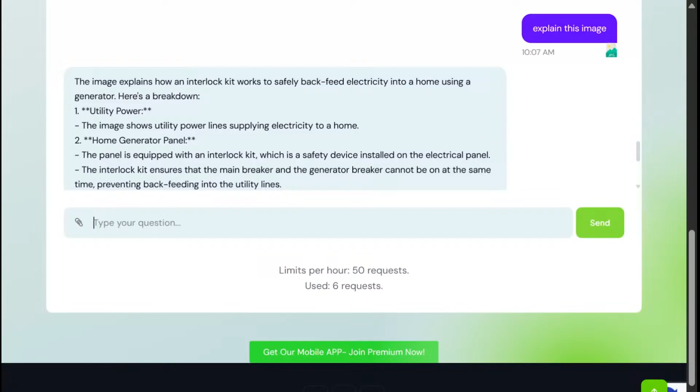So here's what it says. It showed utility power, it shows the home generator panel, it shows the interlock kit. Close up of the interlock kit, shows the installation of it, that type of thing, all this kind of stuff.

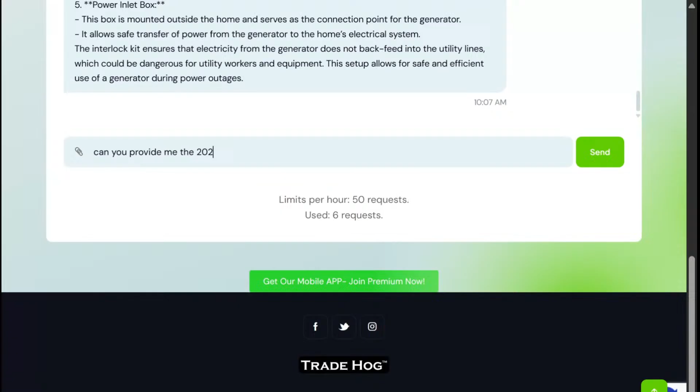Now I'm going to say, can you provide me the NEC, hold on, let me do this way: the 2023 NEC code references based on the image. All right, let's just see what it does. See how I'm feeding it?

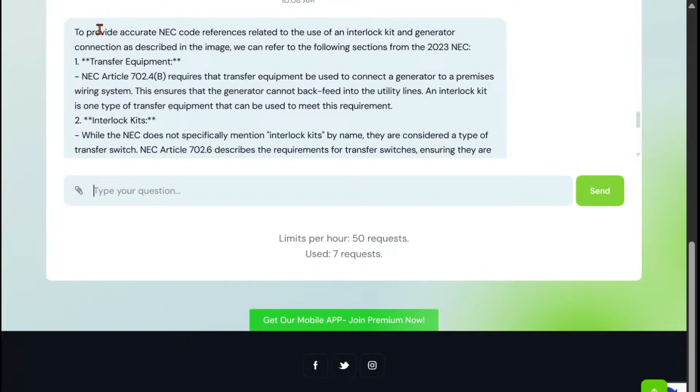Check this out, guys, really. All right, NEC, it's talking about transfer equipment, that's the 702. It's talking about the interlock kit, 702.6, transfer. It's talking about the generator, 445, the connections. It's talking about backfeed prevention, that's 705, interconnected systems. It talks about the receptacle in 406, where the location is based on the illustration.

Guys, can you not see how the Trade Hog could save your day out in the field? That, my friends, was an amazing demonstration of Trade Hog. And we're making it better and better every day.

And how is this different from ChatGPT? You saw how ours was more specific to code references, that's the difference. All right, let's spin this wheel, let's give away some goodness or get you on the drawing. That was a great example of Trade Hog.